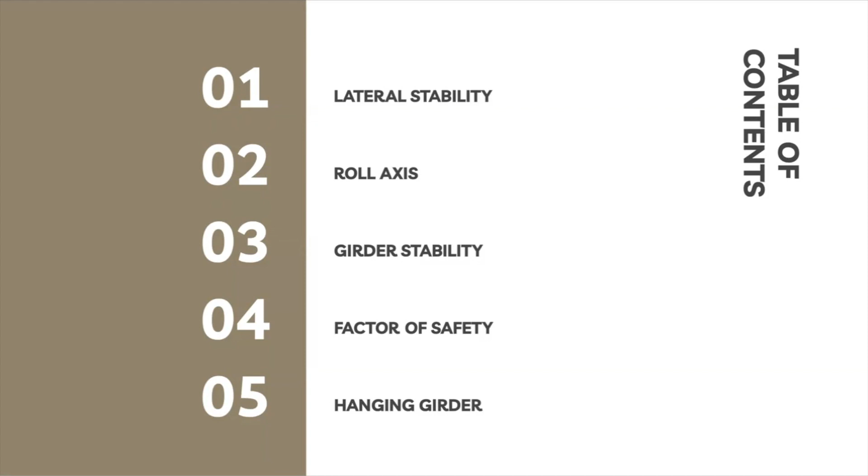So, just a little overview. We are going to be talking about lateral stability, roll axis, girder stability, factor of safety, and hanging girders. So, first off, lateral stability.

So, lateral stability advances in the industry have allowed cross sections to be optimized to take advantage of larger strand diameters and greater concrete compressive strength, which allows for much longer spans. These improvements are great for the industry, but lateral stability still must be considered. And just like a little what's on the page, it's optimizing girder shapes and allows longer span lengths.

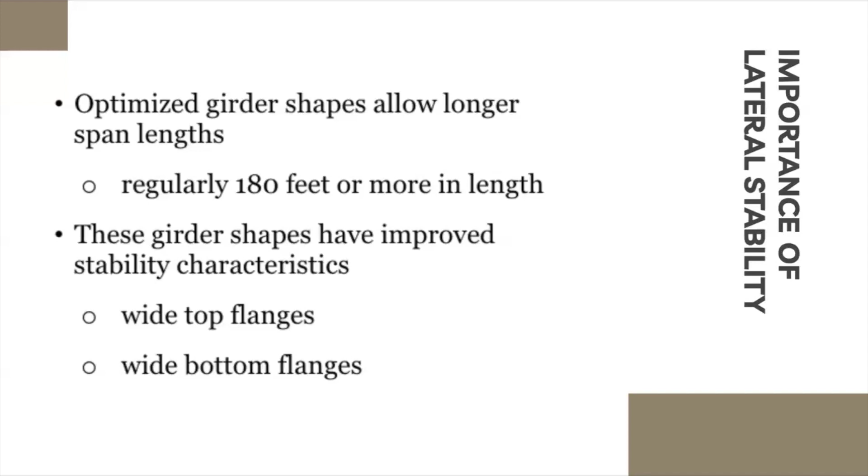Like I said, they're mostly going to be over around 180 feet, but most likely will also increase in length as well. So it says these girder shapes have improved stability characteristics such as wide top flanges and wide bottom flanges.

So now, this is the limitations of the recommended practice, and the information that we cover is applicable for I sections, bulb tees, deck bulb tee sections, or wide flange sections, not box girders or U sections. So, yeah. And what's at the bottom is examples of what each one is.

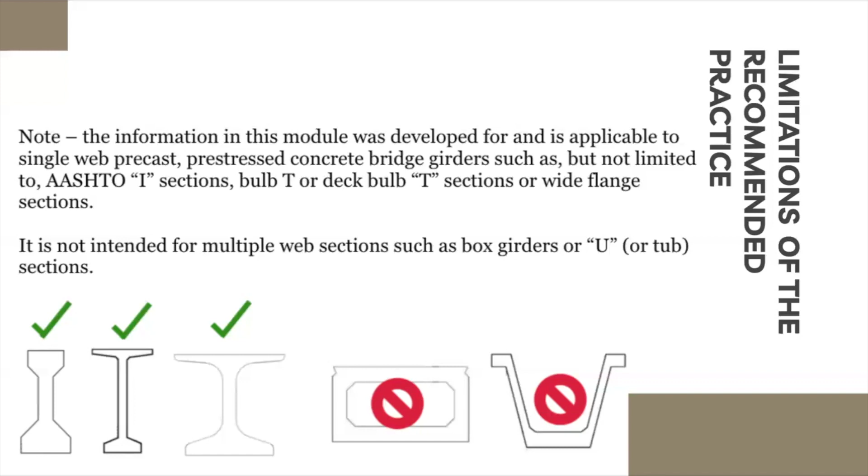To the right, you see the box girder and the U section girders, and to the left is the bulb T, the I beam, and the double deck bulb T. Next, we're going to talk about the roll axis.

So the roll axis is a line that connects the two support points of a girder about which a girder can rotate. The key to defining the roll axis is defining the points where the girder can rotate about. If the girder is hanging, the roll axis connects the 2 points where the girder is connected to the lifting cables. If lifting loops are used, the roll axis is taken as the top of the girder. For rigid lifting devices, it is taken as the point where the device is connected to the lifting cables.

For a seated girder, the roll axis connects the top surface of the bearing pad or support on which the girder sits. All girders have slight imperfections, so the center of mass of the girder may be displaced significantly with respect to the roll axis. This causes the girder to tilt to bring the center of mass under the roll axis. If the supports rotate, this may lead to beam instability. And now we're going to move along.

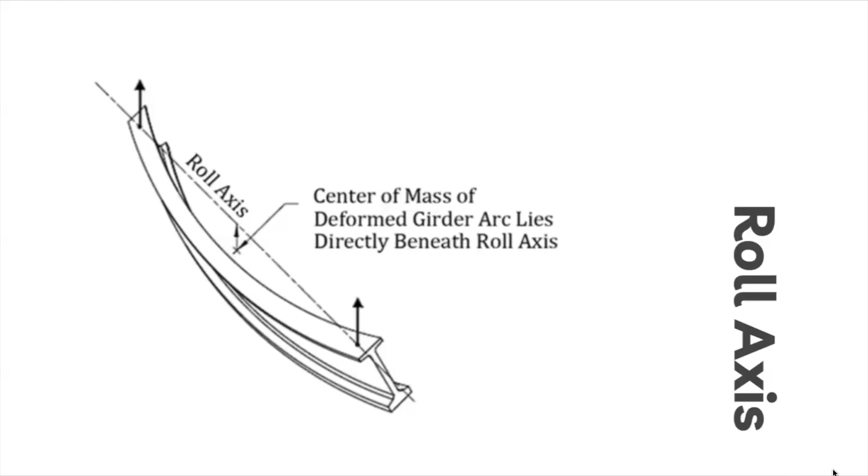Okay, now I'll talk about girder stability. So there are five main phases over the life of a precast pre-stressed concrete girder, and those five phases are lifting, storage in the pre-stressing yard, transportation to the site, erection, and construction. Over all the phases, the lateral stability of the girder must be considered and checked.

At any time where the girder is lifted, there may be no rotational restraint at the lifting hooks, meaning lateral instability is always possible. When stored, the girder is placed on wooden dunnage with no rotational support. During transportation, the girder's stability may be affected by the truck stiffness, wind load, centrifugal force, or change in the wheel path. When erected, the girder must be properly braced to prevent rotation on the supports. Construction loads may also cause lateral instability of the girder. This is why during each stage of the girder, you have to consider lateral stability.

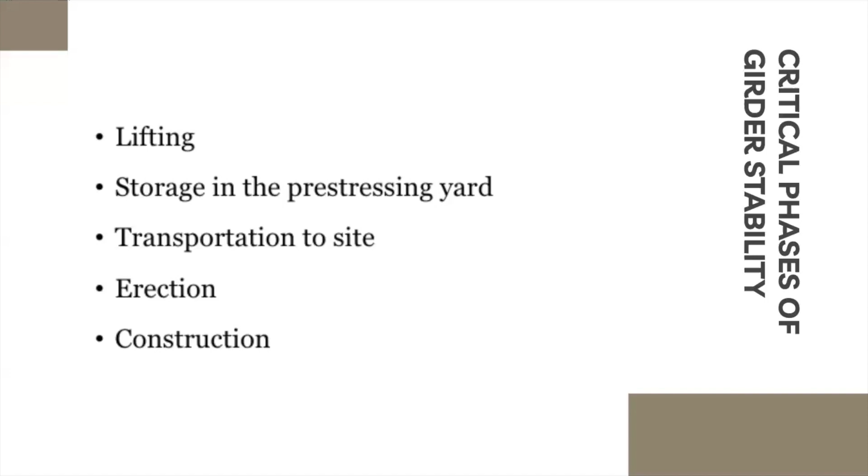So next we'll cover the criteria for girder stability. The analysis of girder stability should conform to the accepted industry practice. The recommended practice establishes criteria pertinent to the design of precast pre-stressed concrete girders, lifting devices, bearings, and bracings that may be required to provide an acceptable factor of safety for lateral stability.

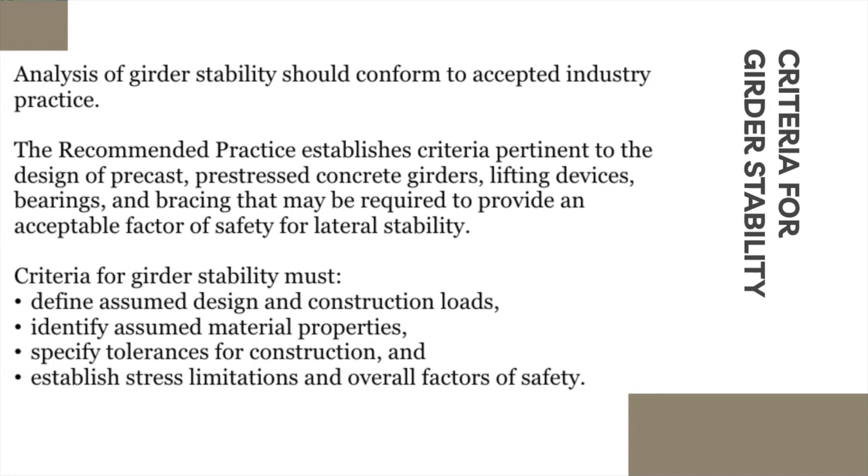The four main criteria for girder stability must include defining the assumed design and construction loads, identifying assumed material properties, specifying tolerances for construction, and establishing stress limitations and overall factors of safety.

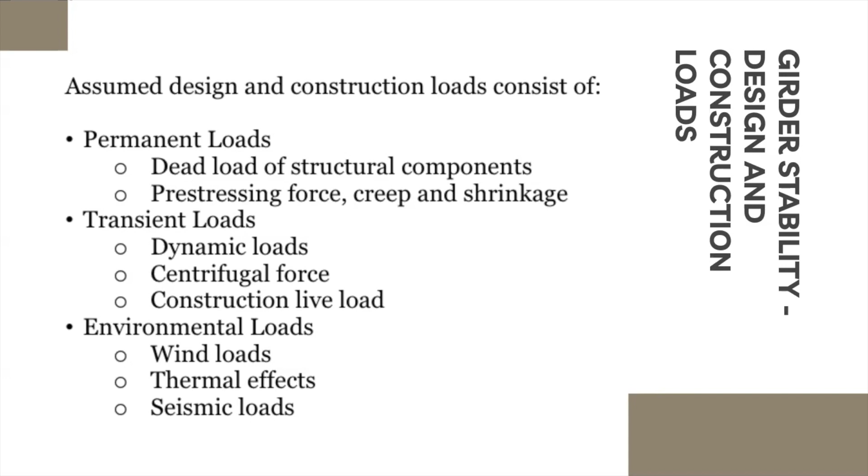So going a little bit more in depth on the dead loads of structural components, one of the big considerations is concrete unit weight. The normal weight of reinforced concrete is assumed to be 150 PCF. Lightweight reinforced concrete unit weight varies from 100 to 140 PCF. Heavily reinforced dense concrete may be as high as 170 PCF.

The weight of falsework and supports must also be considered. The AASHTO Guide Design Specifications for Bridge Temporary Works from 2008 specifies a minimum of 160 PCF for normal weight concrete and 130 PCF for lightweight concrete. This includes the weight of the reinforcement and the formwork of the beam.

Actual dead loads depend on the materials used in fabrication of the girder and construction of the bridge. The engineer should always have a knowledge of the materials used and adjust the calculations accordingly.

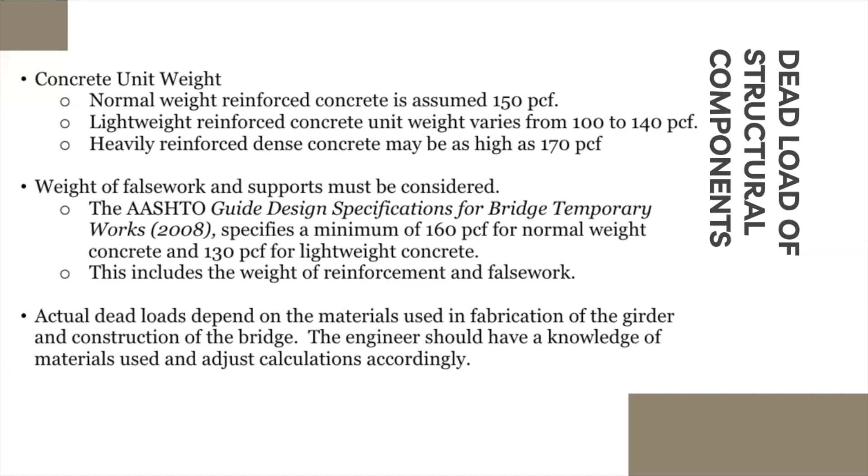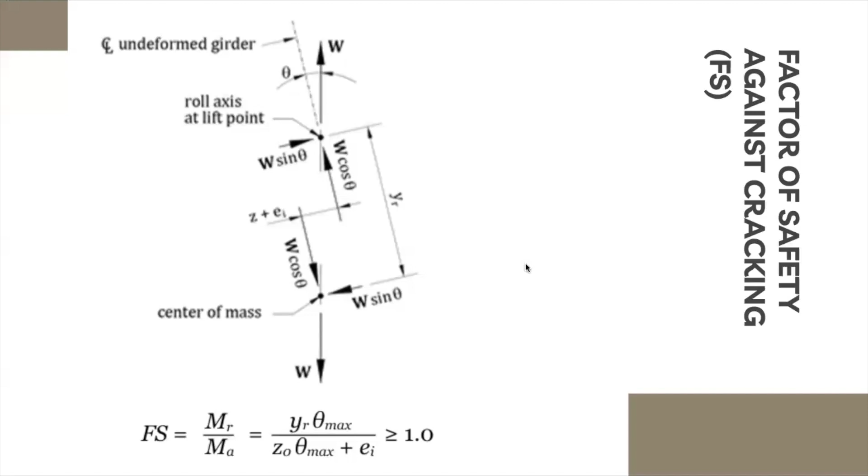Next, we'll talk about the cracked section angle of rotation, also having to do with the factor of safety against failure. So first of all, theta is varied to find the maximum factor of safety. And by differentiating the equation for the factor of safety against failure with respect to theta, the maximum tilt angle can be computed. And the maximum tilt angle is what will be used to find the factor of safety against failure. That maximum tilt angle should be less than or equal to 0.4 radians.

And the factor of safety against failure should be greater than or equal to 1.5. And for cracked section angles of rotation, the sections along the length of the girder should also be checked to ensure that the girder has adequate lateral moment capacity to resist 1.5 times the active moment.

It's important to note that if the factor of safety against failure, Fs prime, is less than the factor of safety against cracking, which is just Fs, the maximum factor of safety occurs right before cracking. Therefore, Fs is equal to Fs prime.

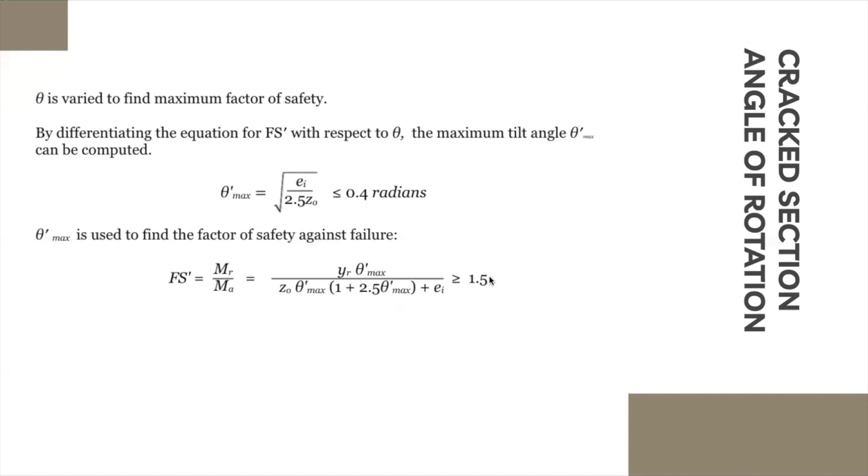Next, we will cover hanging girders. For wind loads, the following two equilibrium conditions must be considered. The left is where the wind load increases rotation and decreases lateral deflection, and the right is where the wind load decreases rotation and increases lateral deflection. From this, we can gather that the rotation and deflection have inverse relationships with similar wind loads.

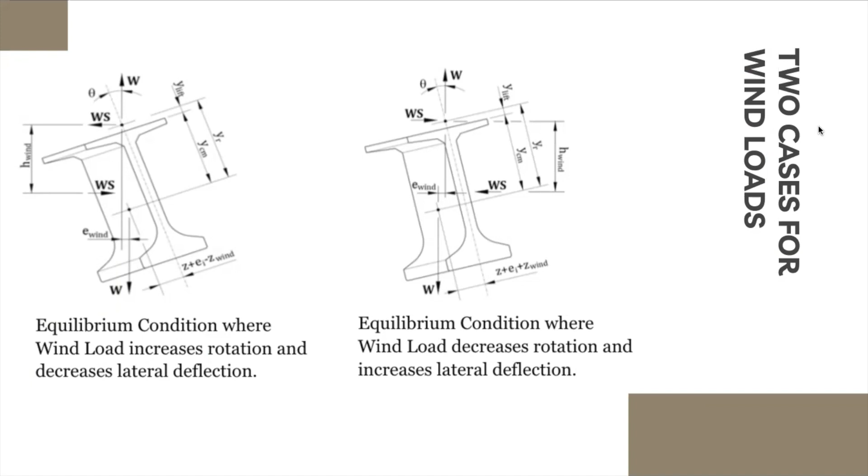In both diagrams, E sub wind is taken as the eccentricity of the girder weight for the girder subjected to the wind load, Ws. Eccentricity is negative when the wind load increases rotation and decreases lateral deflection, and positive when the wind load decreases rotation and increases lateral deflection. These two cases will be further discussed in the next few slides.

We are given an equation at the top, and that is for our active moment. Here Z sub wind is the lateral deflection due to Ws. It is computed using the span between the assumed support or lifting locations. And then by using the small angle approximation that cosine theta equals 1, we have a new active moment equation.

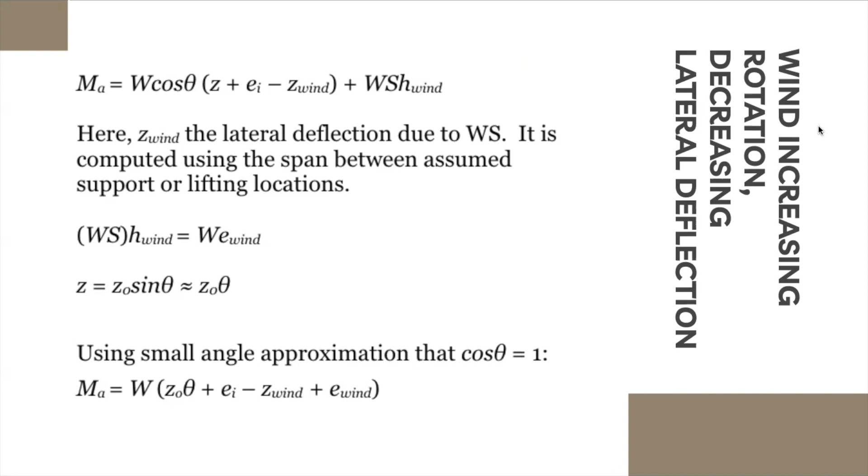The next two slides will outline the derivation of the equilibrium equations due to wind increasing rotation and decreasing lateral deflection. So here we're given the new MA, or active moment equation, and then MR is the resisting moment equation. The equilibrium angle can be found by setting MA to MR and then solving for the angle. Fs and Fs prime can be found by dividing the resisting moment by the active moment.

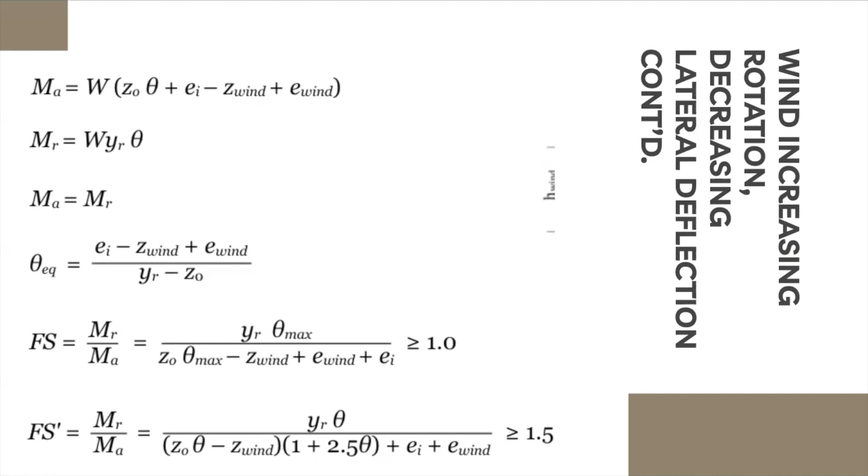Wind force can be strong enough to cause a girder to tilt in the wrong direction. To account for the equilibrium angle going in the wrong direction, the value will become negative, thus modifying the equations to account for the reverse tilt.